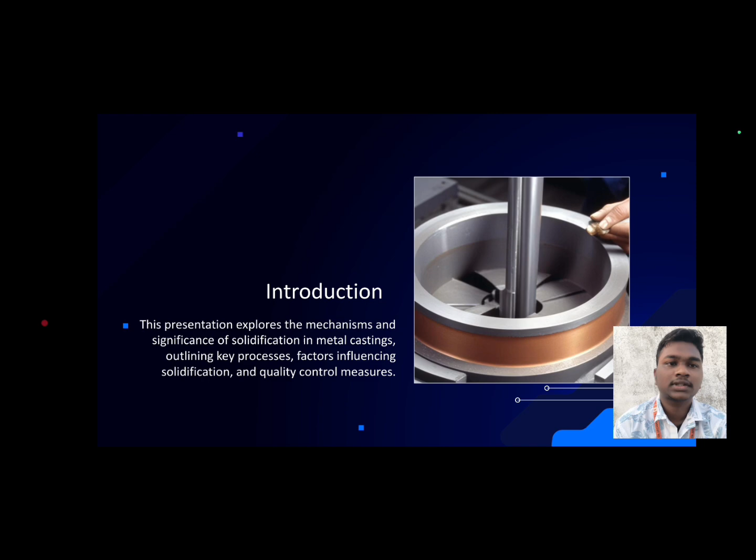So, solidification of castings: understanding the process and its implications in manufacturing. Let us go briefly through the introduction to the solidification of casting. The presentation explores the mechanisms and significance of solidification in metal casting, outlining key process factors influencing solidification and quality control measures.

Overview. Definition of solidification. So we want to know what solidification is. Solidification is the process through which a liquid transforms into a solid as it cools. In casting, this involves the cooling of molten metal until it reaches a solid state. Nothing but the cooling process of the molten metal which we have performed to process the product.

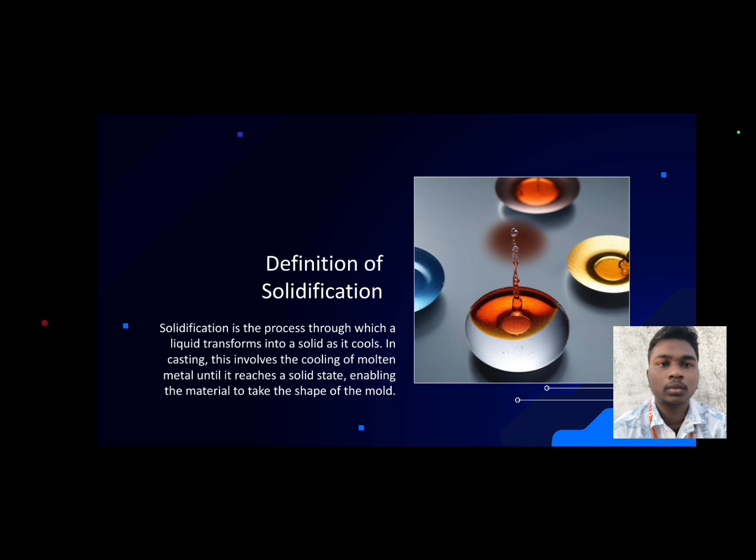So we know that in forming or forging, we can heat the metal above the recrystallization temperature and below the melting point. It reaches red hot and we change it into the required shape. After that we have to reduce that heat or temperature by using solidification. In this solidification we have so many methods like air cooling and water cooling. In air cooling we place the specimen or material in an open area, but in liquid cooling we quench it into water or a water pool. That's it.

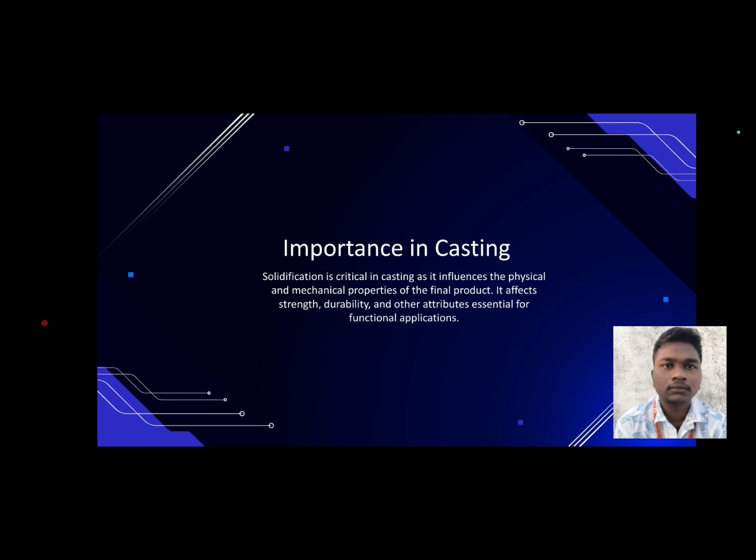Importance in casting. Solidification is critical in casting as it influences the physical and mechanical properties of the final product. It affects strength, durability and other attributes essential for functional applications. As I said in the previous slide, because of this cooling the properties of the metal will improve: mechanical, chemical and physical properties, as it affects the strength, durability and ductility which the metal must withstand, depending on the application.

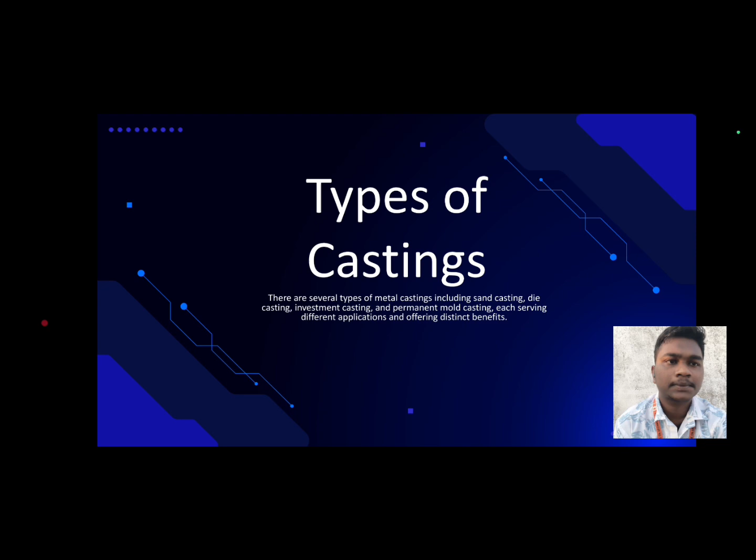Types of castings. There are several types of metal casting including sand casting, die casting, investment casting and permanent mold casting, each serving different applications and offering distinct benefits. Solidification process. Let us see how the solidification process works. Nucleation is the initial stage of solidification where small particles form within the liquid metal. The process can be influenced by temperature, impurities and other factors playing a crucial role in the microstructure of the solidified casting. Nothing but the grain structure formation.

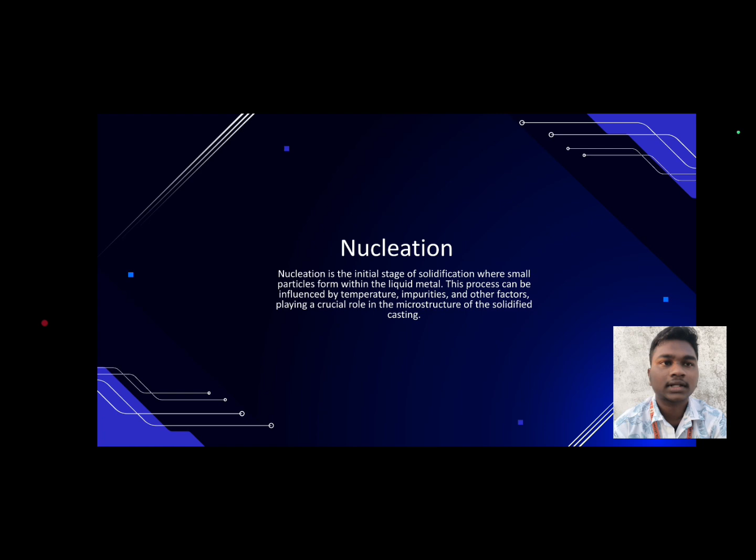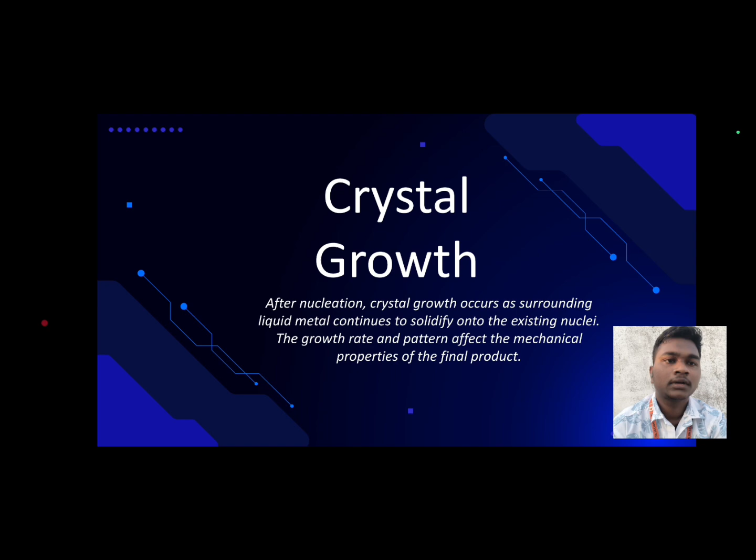We all know that. Crystal growth. After nucleation, crystal growth occurs as the surrounding liquid metal continues to solidify onto the existing nuclei. The growth rate and pattern affect the mechanical properties of the final product. The cooling rate, meaning the rate at which the molten metal cools, significantly impacts the grain structure and overall quality of the casting. Faster cooling often leads to finer microstructures, whereas slower cooling can result in coarser structures.

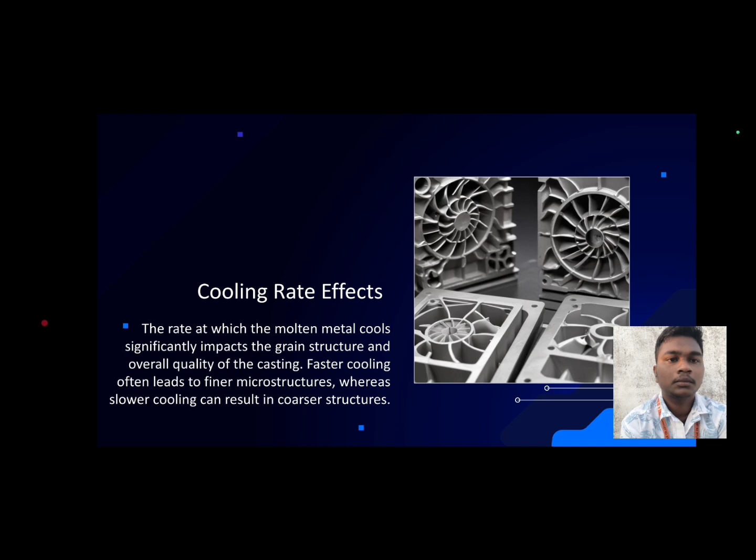Because the cooling rate means the duration we spend on solidification, with more time we get a large number of large-sized grains. Because of the short time, we get fine microstructures and nuclei will be formed. Now let us see the factors influencing solidification.

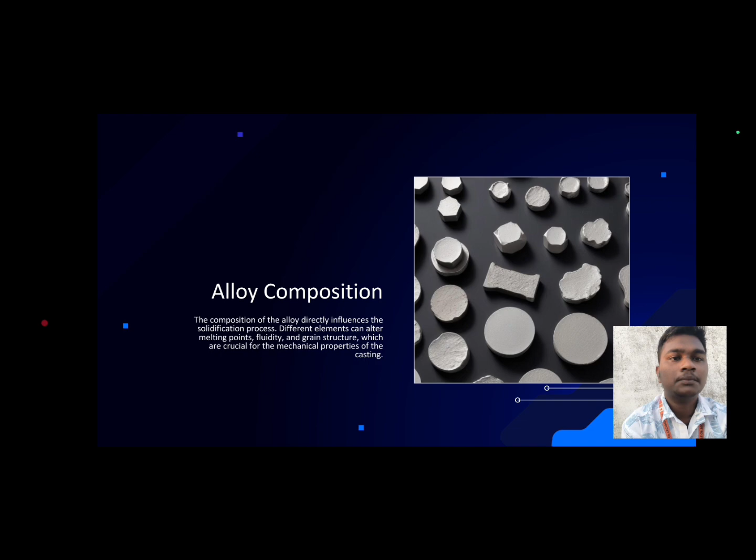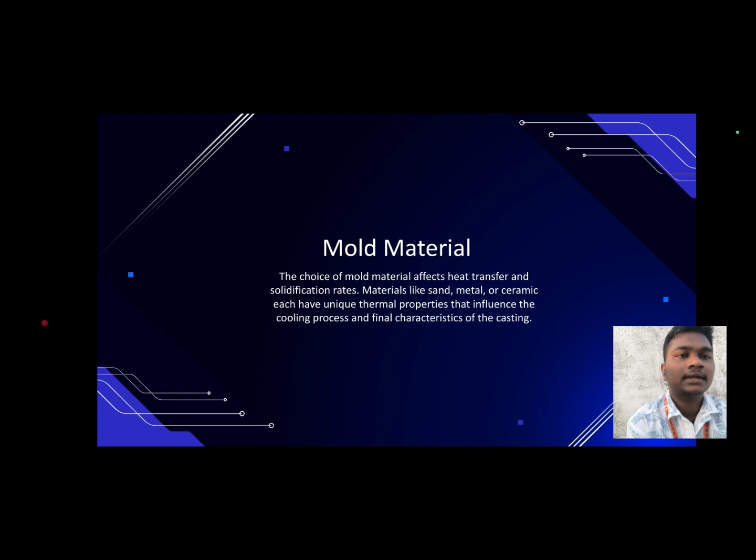Alloy composition. The composition of the alloy directly influences the solidification process. Alloying elements can alter melting points, fluidity and grain structure, which are crucial for the mechanical properties of the casting. Mold materials. The choice of mold materials affects heat transfer and solidification rates. Materials like sand, metal or ceramic each have unique thermal properties that influence the cooling process and final characteristics of the casting.

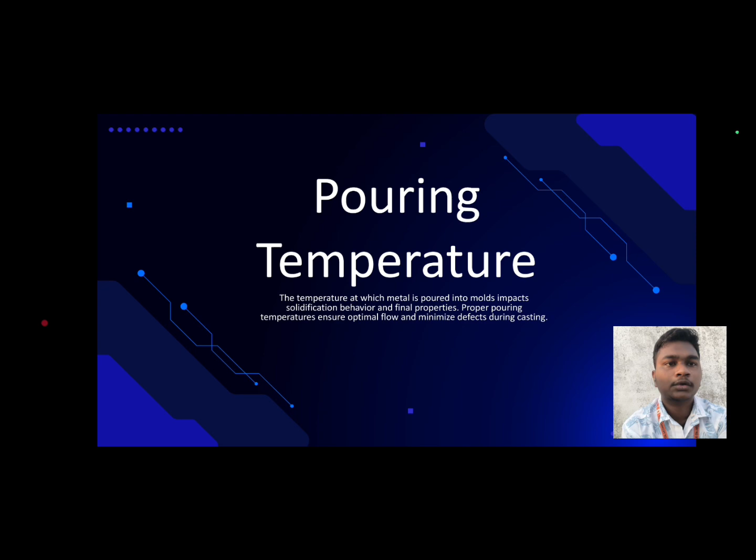Pouring temperature. Let us take the example of sand casting. While we pour the molten metal into the mold cavity, the temperature at which metal is poured impacts solidification behavior and final properties. Proper pouring temperature ensures optimal flow and minimum defects during casting. Depending on this we can gain an accurate product with good mechanical and physical properties. That's it.

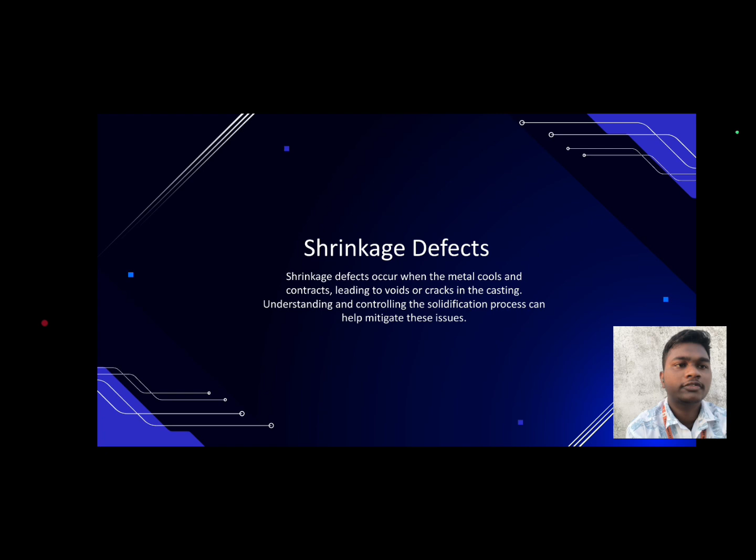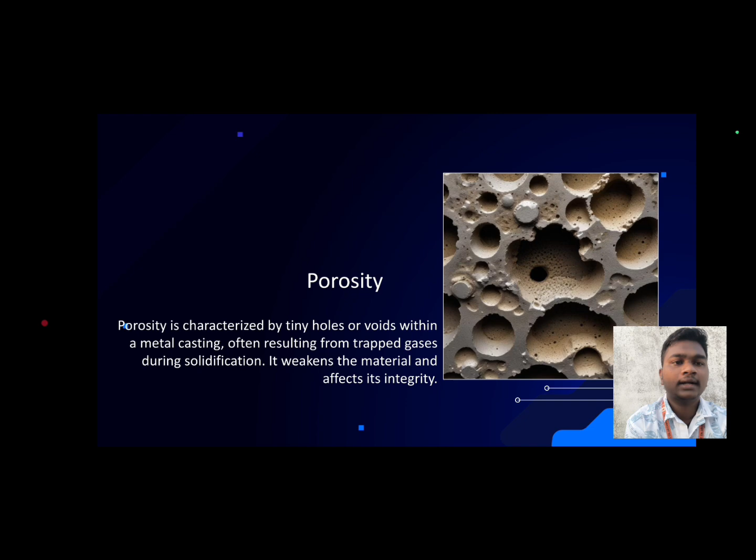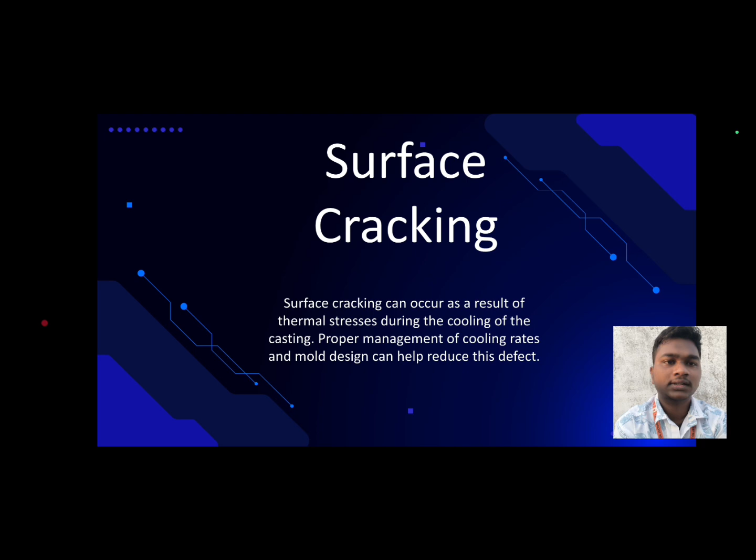Defects in casting. Shrinkage defects occur when the metal cools and contracts, leading to voids or cracks in the casting. Understanding and controlling the solidification process can help mitigate these issues. Porosity is characterized by tiny holes or voids within a metal casting, often resulting from trapped gases during solidification. It weakens the material and affects its integrity. Surface cracks can occur as a result of thermal stresses during the cooling of the casting. Proper management of cooling rates and mold design can help reduce these defects.

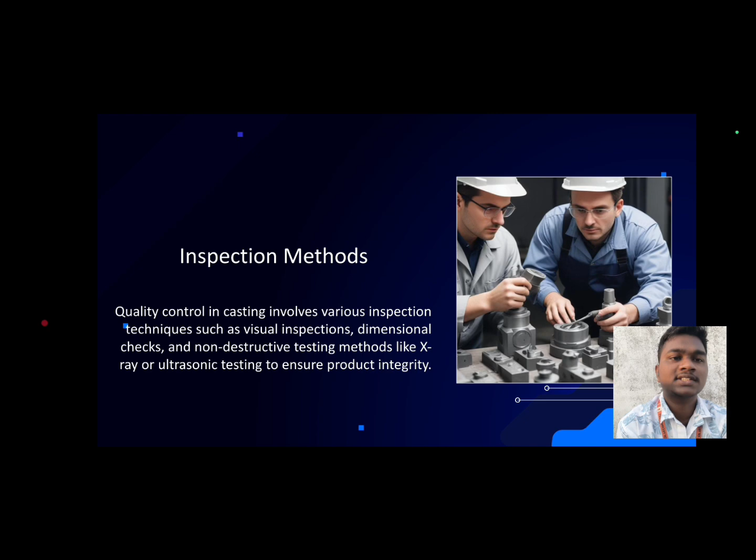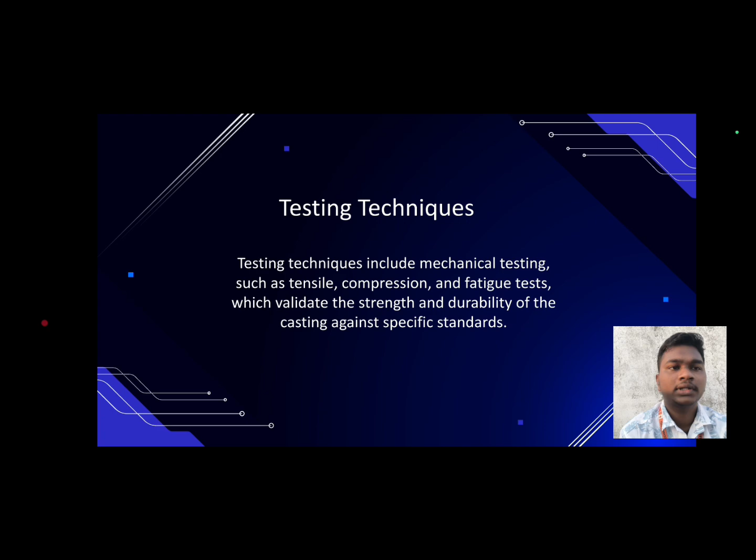The fifth one, quality control. Inspection methods. Quality control in casting involves various inspection techniques such as visual inspection, dimensional checks, and non-destructive testing methods like X-ray or ultrasonic testing to ensure product integrity. Testing techniques include mechanical testing such as tensile, compression and fatigue tests, which validate the strength and durability of the casting against specific standards. Enhancement strategies involve optimizing the solidification process through better mold designs, alloy modification and process parameters to improve the quality of the final casting.